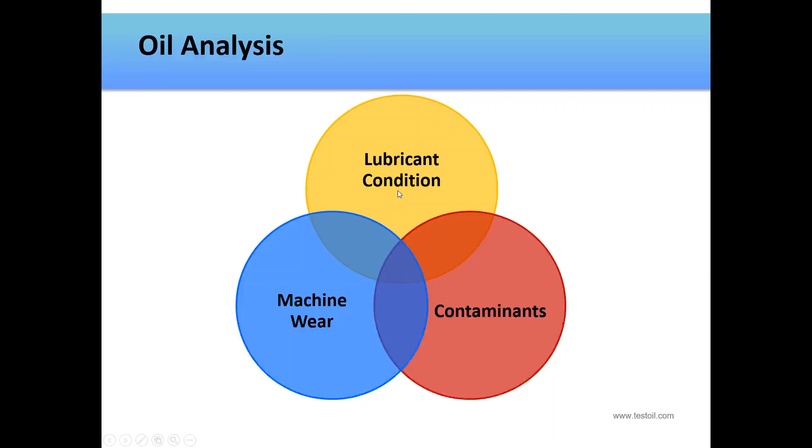Now, the first test that we'll talk about today is viscosity. I can't imagine there are very many samples that come in that don't get this test. This is a very basic test. We're measuring the thickness, or the resistance to flow, of the lubricant itself. Ideally, industrial oils are measured at 40 degrees Celsius, and motor oils are measured at 100 degrees Celsius. On the report, it's reported as kinematic viscosity in centistokes.

A lot of times when I'm taking a look at the report, especially when it comes to viscosity, knowing what kind of oil is paramount. And you would be surprised at how many samples come in that don't have an oil identified, and that really handcuffs me. I can't give a recommendation of whether or not this is in or out of range if I don't know what the oil is.

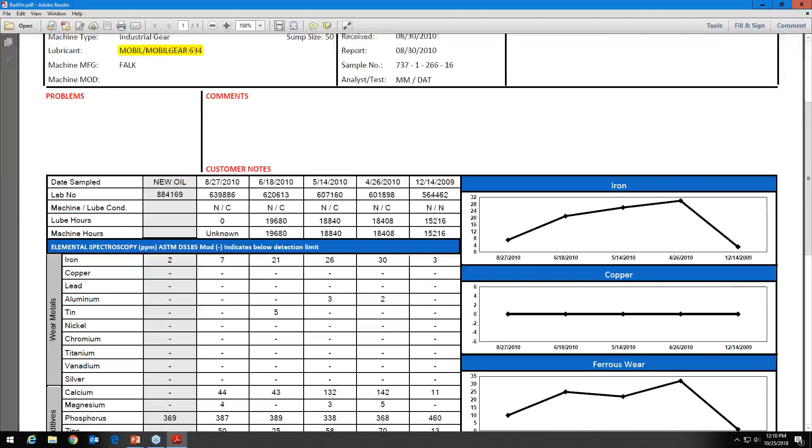And for most of our oils, we have a pretty good library of oils. Now, we don't have every single one that's on the planet, but the main ones, especially Mobil products and Shell and Lubrication Engineers, we have a lot of different resources when it comes to what the new oil should look like. So this one does have a new oil column populated. If you get a report that doesn't have it populated, that means that we haven't seen a sample of new oil of that product, and until we get one, we won't be able to populate that column.

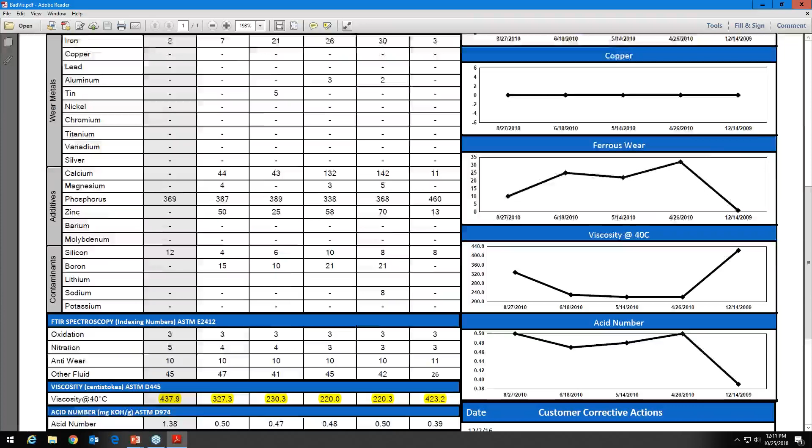All right, so we're working top down. We want to know what is the viscosity grade of this product. The new oil falls at 437.9, and that's within 10% of a 460. So a 460 is our viscosity grade for this product. And taking a look at this particular sample, we can see that this has definitely had some viscosity issues. I like to use this one as an example because I believe that this is a straight viscosity issue. There's a misidentification going on here between what is in our database and what's in the actual machine.

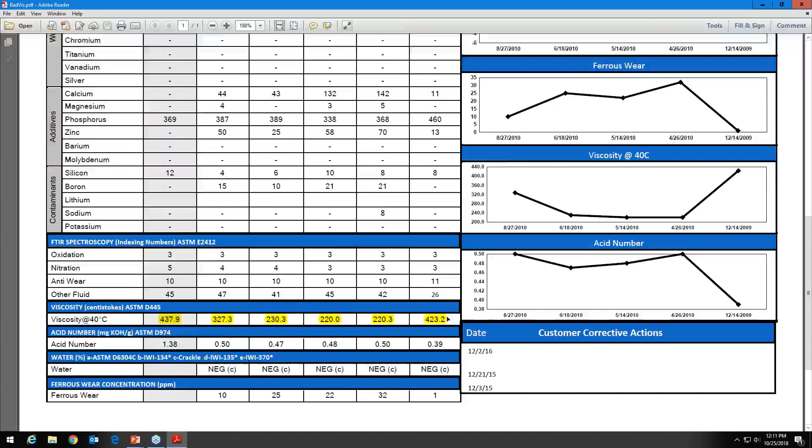So this December 2009 sample back here is a 423, and that's in the ballpark of a 460. However, we can see that the very next sample went to a 220, and that's like 2 grades away. So of course that's going to be rated critical. It was 220 the next one, 230 the next one, but then our most recent report has 327.3. So we've gotten closer. This is the next grade up from a 220 to a 320, but it's still not the right product for what we're saying is either on the report or in our database.

So when I see reports like this, to me, this is an oil identification problem. This isn't necessarily a problem with the oil itself. This oil probably is supposed to be a 320. It looks like a 320, but we're saying that this machine should be having a 460.

I see this happen a lot with new programs. Usually, the first time that we see samples from a new customer, we get the information from their database, we put it into our system, and then we do the first round of samples. We'll run the first set of samples, and a number of them will be flagged for viscosity, and when you look at it, it's really an issue of identification, not necessarily that this oil is bad and needs to be changed out. Well, if we change it out with a mismatched lubricant, we're not really making any progress.

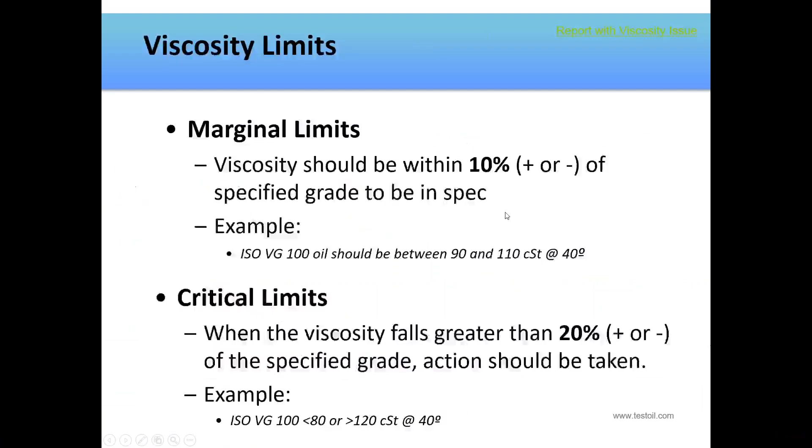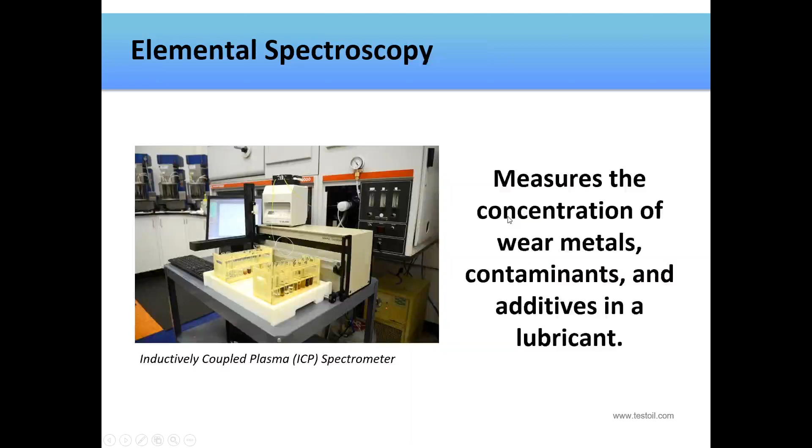So another common test that we run is called elemental spectroscopy. If you're familiar with oil analysis reports, this is the section where we list all the different metallic elements. We measure 20 different elements, and they're broken down into general categories of wear metals, contaminants, and additives. On the report, they're in parts per million. It measures metals in solution, which goes along with solid debris below 7 microns in size. It's blind to larger particles.

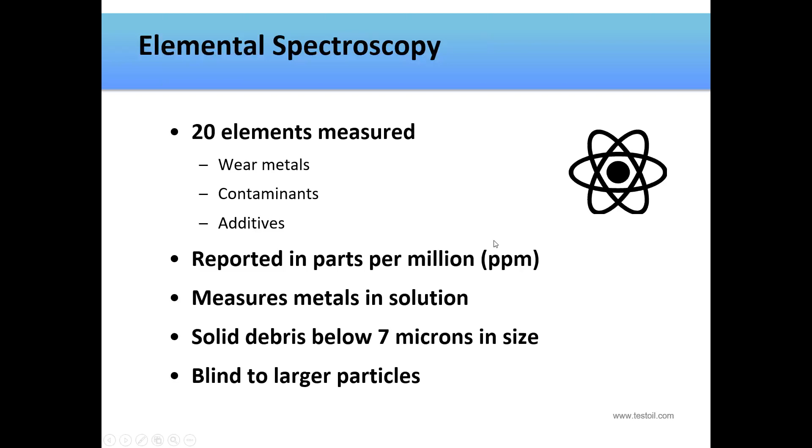This is really important when we talk about report interpretation, and it dovetails into test package selection. Let's say you have a very large gearbox that, when it goes into a failure mode, generates very large particles, but not very many small particles to go along with it. We wouldn't want to rely on this test alone to find that kind of problem. If we understand that this instrument can't see very large particles, we would want to back it up with another test, and we'll talk about some of those other tests in a little bit. That's a key thing to know about interpreting the data from this instrument.

If we're taking a look at the report and we see one metal dominant over another, or a mixture of some, like copper or tin or lead, it can point us into certain directions of what exactly is wrong with that particular machine.

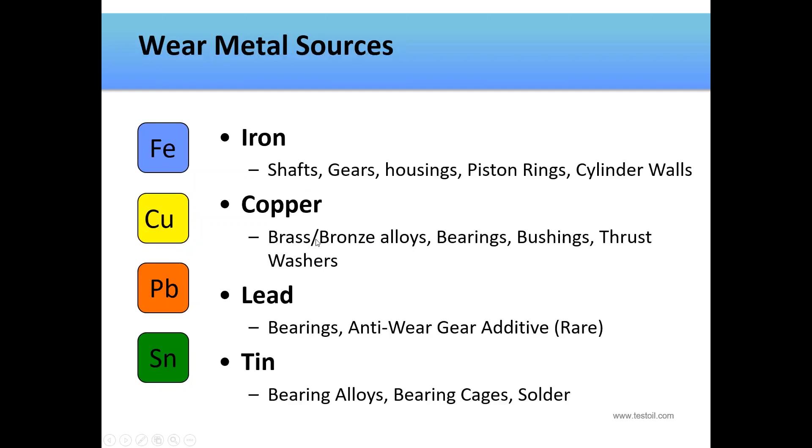Some other wear metal sources are aluminum, chromium, nickel, and silver. And let's take a look at a report with a wear issue.

Matt, can I jump in real quick? Will you just explain the new oil column? I do have someone asking me if that's filtered or unfiltered oil, and maybe you could discuss the difference between the reference oil that we used to call that column.

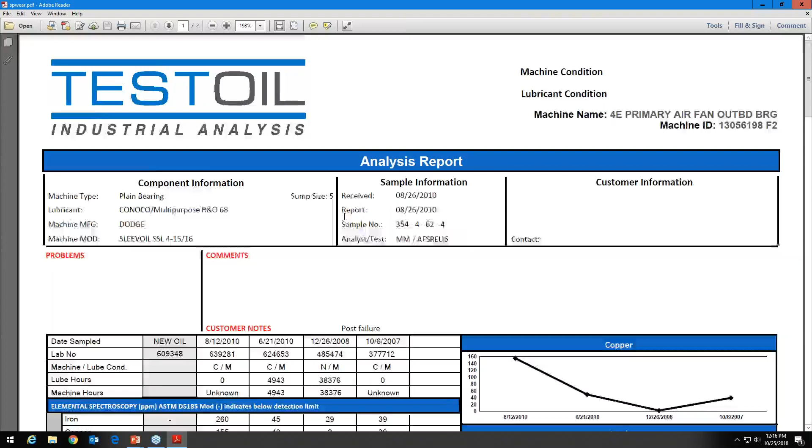Sure. Yeah, and I can use this report right here that has one. So this one here has our lubricant as Conoco Multipurpose R&O 68. And for this new oil column, at some point a customer has sent us in a sample of new oil. Whether it's filtered or not, it doesn't really matter, because we're not going to use the particle count as an alarm.

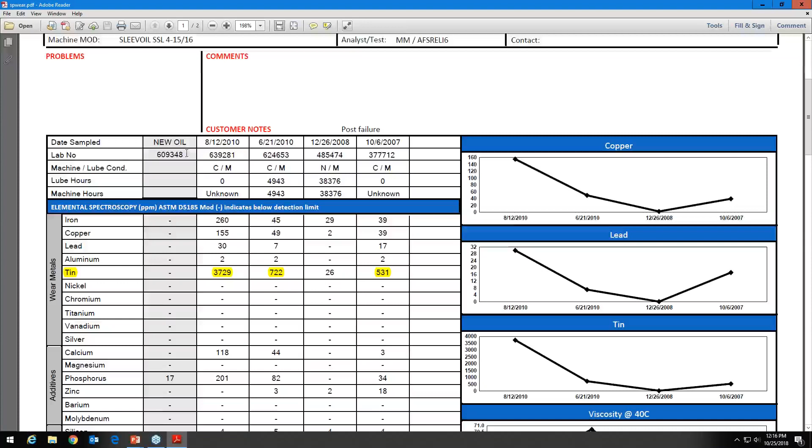We're not going to say that because your sample is dirtier than the new oil, that's not exactly the alarm that we use. And I'll talk about alarms for particle counts in a little bit. But for the new oil column, that's exactly what it is. If somebody has sent us a sample of new oil, we run it in a house account, and then we attach that onto the oil.

So when you take a look at the report, that new oil is attached to whatever it says here on the top of the report. Like I said, this one says Conoco Multipurpose R&O 68. Somebody has sent one of those in, and then we attach it from that point forward.

Now, there are some options. Let's say that we have a customer who says, well, I'm very particular about what I want to see on my new oil column, and I only want you to use what I send you. We have provisions that can do that. We can attach new oils from a particular customer to their reports only. But again, we're kind of using the bank of knowledge from everybody to post these.

That being said, if there's a big difference between the lab number of the new oil and yours, one being very small and one being very large, you know that perhaps that's an older reference that we might want to get updated information on.

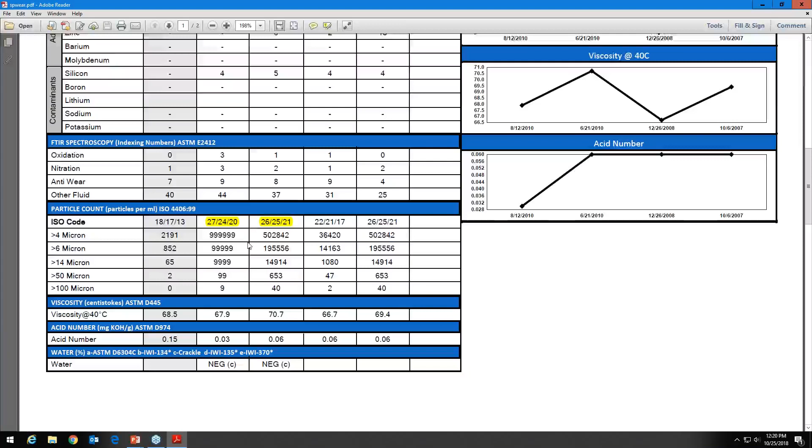And just as a side note, notice the particle count on this is significant. In fact, if you get a report with all 9s on it for particle count, that essentially means that it's so dirty that it doesn't even run on the particle counter. And this other result before is actually the maximum reading of the particle count. So a lot of particles in the oil.

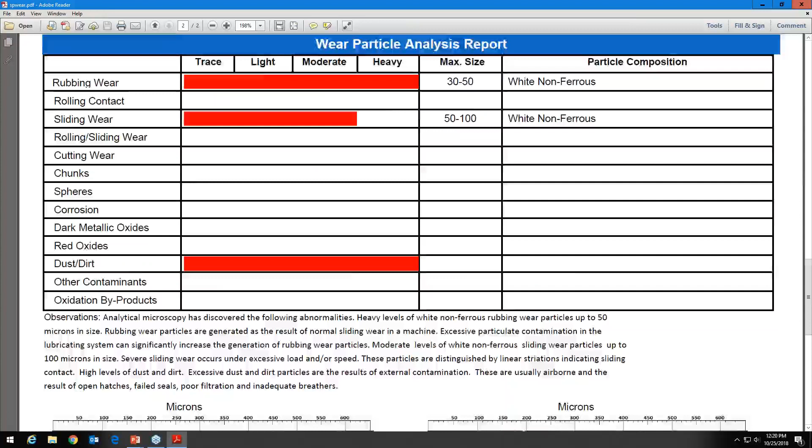We've got significant amounts of wear metal, especially tin, on this particular machine. And if we take a look at microscopy pictures, we can see some very large wear particles. And when we take a look at these pictures, a lot of times I refer back to these when I'm trying to decide, hey, what do I want to make my overall machine condition on this report? We always leave it up to our analysts to have the last word on how we should flag this report.

When I'm taking a look at the reports, especially when I see, one, we have a significant tin number, two, these particles are very sizable. So I know that there's a major problem with this particular machine. So I'm going to make this report critical.

But sometimes, and we'll talk about it a little bit more, you may be above the limit on like iron, but when we take a look at the analytical microscopy, we might find a different story. We might say, oh, well, this isn't really metallic wear or active wear, it's corrosion. And that might change how I interpret the report, what kind of rating I'm going to give it.

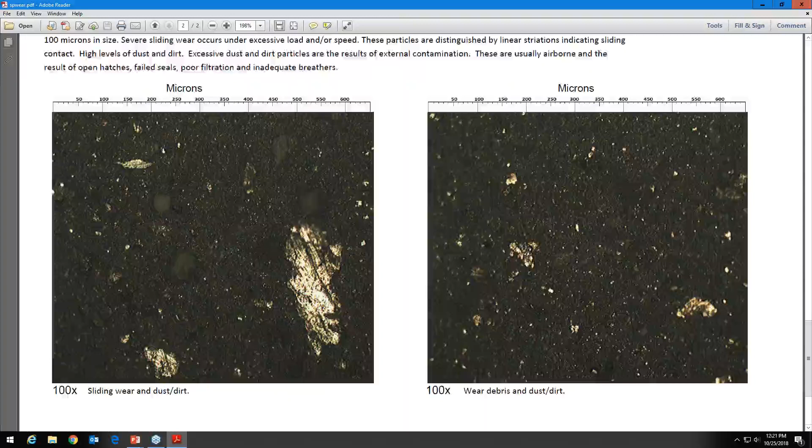But we give a lot of leeway to our analysts as far as what's the overall machine condition. Just because we have this high number here, we want to take a look at that additional information from the analytical microscopy to make a decision on, is this marginal, is this critical? Maybe depending on the rest of the data that's on the report, we can see that perhaps it wasn't the best sample. Maybe it's not a representative sample. That can happen where, let's say we have an unusual particle count and we see a lot of dust and debris. We're going to see some other stuff too if we haven't pulled a really good sample.

All right, so in general, I can give you a number on wear metals. I can say, hey, your iron's 50. Okay, is that good or bad? We have to put limits on these numbers. And for my example of iron of 50, let's say that we have a small gearbox. 50 might be perfectly normal.

So a lot of times when you take a look at the report, especially if we have historical data, when we have a lot of information from that particular machine, we could say, yes, a 50 is unusual because previously it's been steady at 10 parts per million. Or we can say 50 is not a problem because it's always been 50 the last few times that we've seen it, or we have a slowly increasing trend that we're seeing.

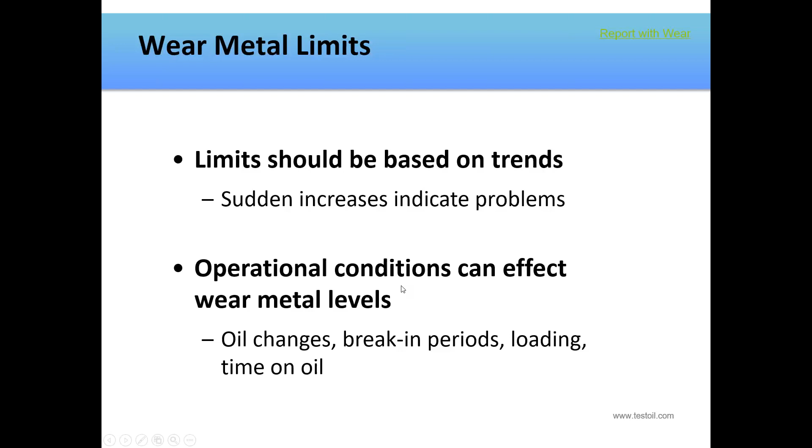That being said, operational conditions can affect wear metal levels, meaning if there's an oil change or it's a brand new machine, or we've changed the way this machine runs or the type of load that it's under, that can make a difference. And especially with loading or changes in that, sometimes as analysts we don't get that information. And so we may see, oh my gosh, this iron has increased quite a bit. You receive the report back and say, we're changing what we're doing with this machine, and that is the reason why we're having that particular issue.

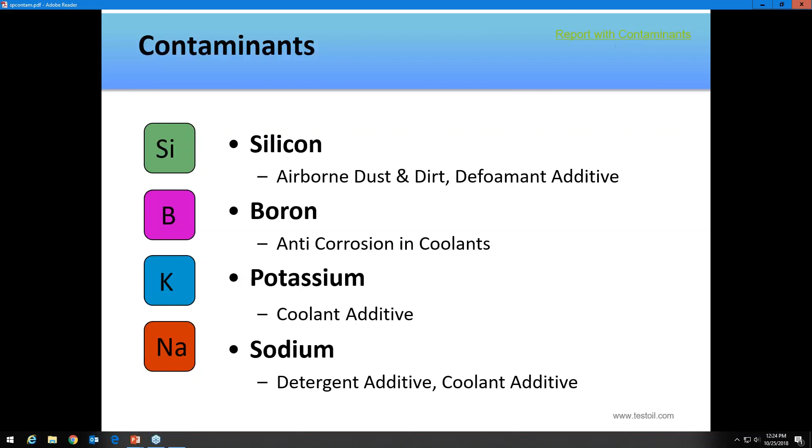All right, so the other category of elements are contaminants, things like silicon, boron, potassium, and sodium. Let's take a look at a report that has a contamination issue. So again, working top down, we have machine type. It's a hydraulic system. It's using an anti-wear oil with a viscosity grade of 46.

And right off the bat, even before I go down and look at the rest of this report, I'm already thinking, all right, anti-wear. I should be seeing elements like phosphorus and zinc. That's part of the anti-wear package. Some of them have calcium in them as well. So let's take a look at what we actually have on here.

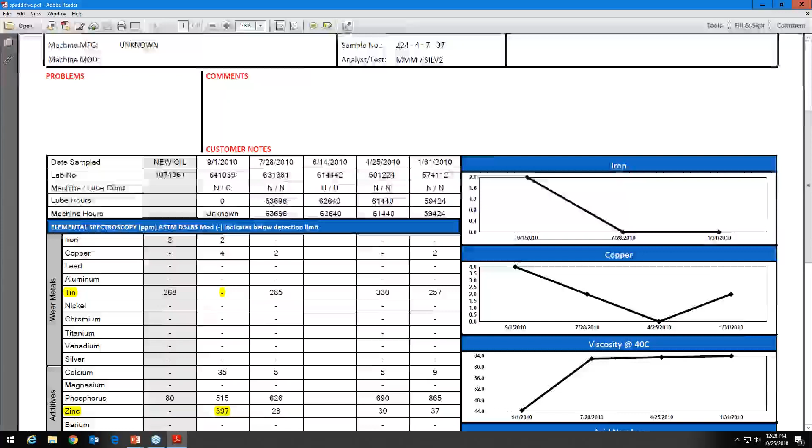So if we take a look at the new oil column, we notice that this new oil actually has tin in it. With this particular product, it's a byproduct of how it's made. This 268 tin isn't a wear metal. So I like to use this report because it shows you that just because we group these into general categories doesn't necessarily always mean that, oh my gosh, it's tin, it has to be a wear metal. Well, not necessarily, not in this case, for sure.

What else do we have? Well, it has 80 ppm phosphorus in the new oil. Well, what about our current sample? All right, so our current sample doesn't have any tin. And it has a significant level of calcium, phosphorus, and zinc.

This looks a lot like the report we just looked at with the anti-wear. And we know that an anti-wear product can be used in hydraulic systems. But we definitely have a significant difference here between what's in the machine and what we're saying is in the machine. If we take a look at the previous sample, that previous sample did have tin in it. So it looks like this was the correct product back here in July, but now here in September, it's not.

All right, so let's keep going down the report and see if we have any other information. So viscosity. The new oil is supposed to be a viscosity grade 68. We have a 46. It was a 68 before. And then also take a look at the acid number. The acid number of the new oil was 1.31; this product that's currently in the machine is 0.42. It's lower, and significantly lower than our new oil. That doesn't naturally happen.

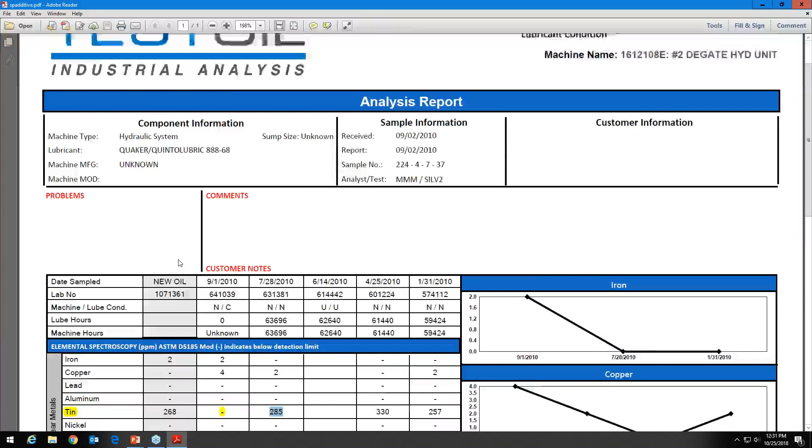And in fact, this product, the Quintolubric, is in the family of fire-resistant hydraulic fluids. So this one here is near systems with open flames, and they want to have a product that's fire-resistant. This product that's in the machine now is not. This is a safety issue. So this would be definitely a critical report. You have the wrong product in this machine right now.

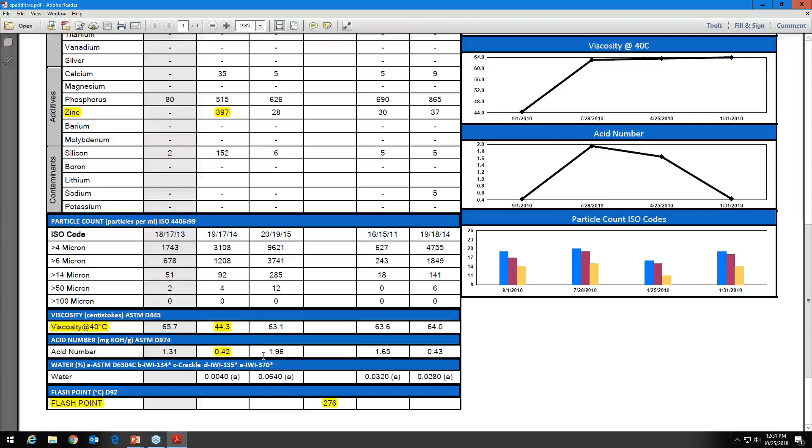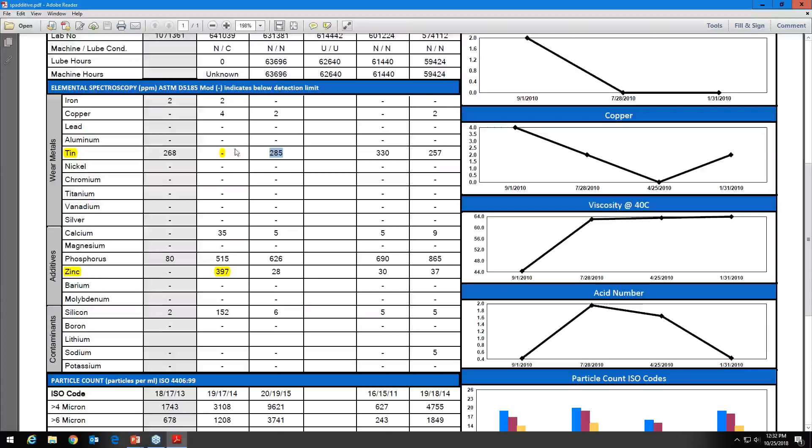And as we talk about fire resistance, just notice the flash point that was previously tested on this as well, that's a pretty high temperature, 276 degrees Celsius. So again, that reiterates the fact that this is a fire-resistant hydraulic fluid that's supposed to be in here, and what we have is not. So again, we detected that first by taking a look at the additives, and that there was a significant difference between the new oil column and our current result and previous results.

Okay, so that was talking about elemental spectroscopy. Now we're going to talk about a contaminant, which is water, and the test that we use for that is called Karl Fischer water titration. And it's governed by an ASTM method, D6304. On the reports, you'll find that we may be reporting in percent, that's our default unit, or if the customer has asked for it, we'll report as parts per million.

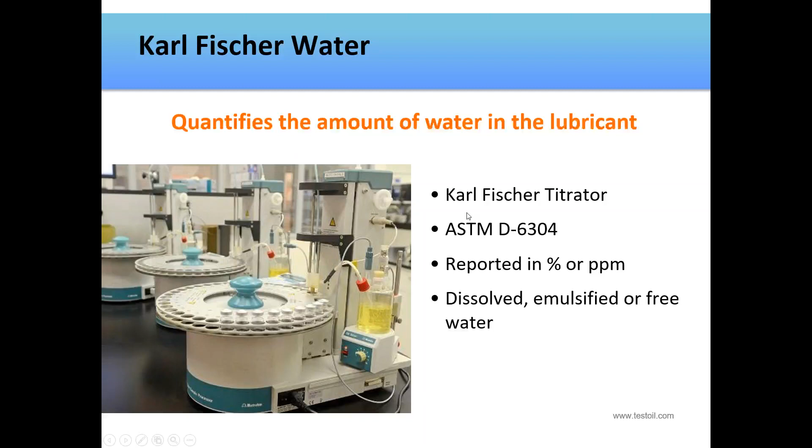So when I take a look at these and I see a report with high amounts of water, I always try to keep in mind, well, where is it? Where is this coming from? Is this a condensation issue? Is it coming from the outside? Or do we have a particular machine where we might have internal leaks that are allowing water to get into our lube oil?

So here we have an air compressor using a product called Sullair Sullube. And if we take a look at this particular one, we can notice that in our new oil column, the way this is formulated is it uses barium as the additive. That's kind of unusual. It's one of the reasons why I like to talk about this particular report, just to let you see there are different types of additive formulations out there. This particular one uses barium. On our current result, we don't really see any kind of elements. In the past, we had barium.

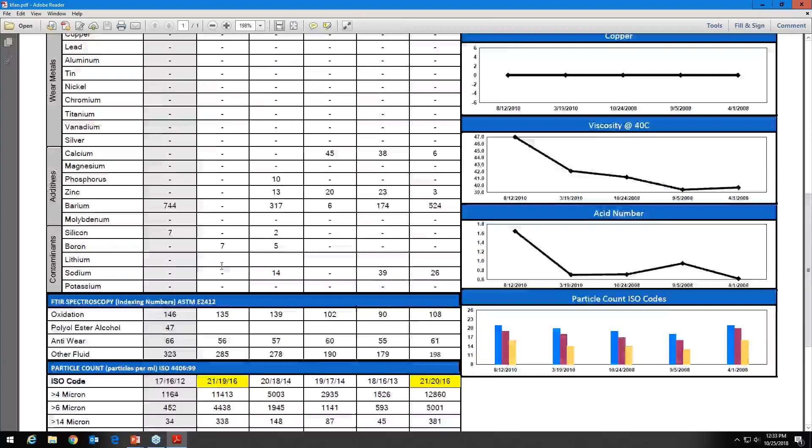And if we keep paging down, we can see some other stuff. We notice that on the IR that we'll talk about in a little bit, it does have an oxidation number of 146 brand new, which is kind of unusual. Some of the previous reports we looked at, the oxidation was not that high. All right, so we have a particle count issue. Our viscosity is too high. Our acid number is elevated, and here's our water at 0.8416%. So we've got a water issue with this.

Our oil is degrading, right? Because one of the things that we look for in degraded oil is an increase in viscosity, which was pretty steady. We've had 39, 39, 41, 42. Now we have this 47, a significant increase.

We also see the same thing with acid number. On this particular product, we do have guidance from the lube manufacturer, and they say that we should not have an acid number greater than 1.0 for this product. And this one is above that with 1.65, and therefore it's being alarmed.

But a lot of times what I find with not only this product, but a lot of different oils, is that when we tend to have a significant amount of water, it's not unusual to see a corresponding increase with acid number. And in this case, it's a fluid degradation, but in some cases, when we have both a significant amount of water and a high acid number, it's usually the water that's causing that initial problem.

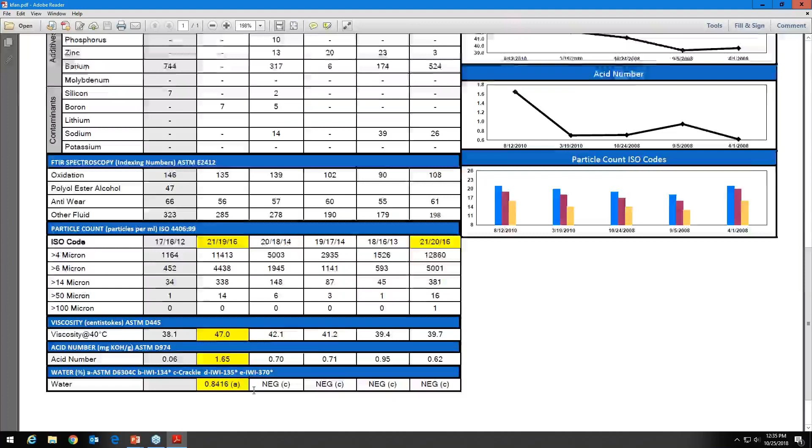This one here with the compressor, there could be many reasons why we're getting water in this system. It could be an internal leak. It could just be the fact that we're drawing in very humid air, and it's dissolving into the oil instead of going out the airstream. So this one's kind of interesting. It shows a little bit different formulation than we've seen. Let's take a look at another report with a water issue.

All right, so this one is what's called a Morgoil system. And these Morgoil systems are expected to get significant amounts of water in them. These things exist in steel mills, and they're in environments with a lot of water in close proximity. So they are expected to get some type of water contamination. In fact, the alarm limit for water on these systems is 2%. That sounds probably very high to you, but if it's less than 2%, they consider that normal on this type of system.

All right, so we've got this Morlina SD680 in this Morgoil system, and it doesn't really have much in the way of elemental content. Nothing that I would say stands out as far as additives. And as we go down the report, I want you to take a look at the relationship between the amount of water and our viscosity on this one. This is one of the reasons why I use this particular report.

Notice way back here that this particular load of oil with this 9,999 viscosity, again, that tells you that this fluid was so thick that it didn't even flow through our viscometer. There was an issue. But then this next sample, we have 20% water, 1,222. Remember, our new oil is supposed to be in the 680 range, and we have 700 here. So we have 20%, it's at 1,000. We have 5.96, it's at 1,053. 9.76, 959. 12% water, 1,071.

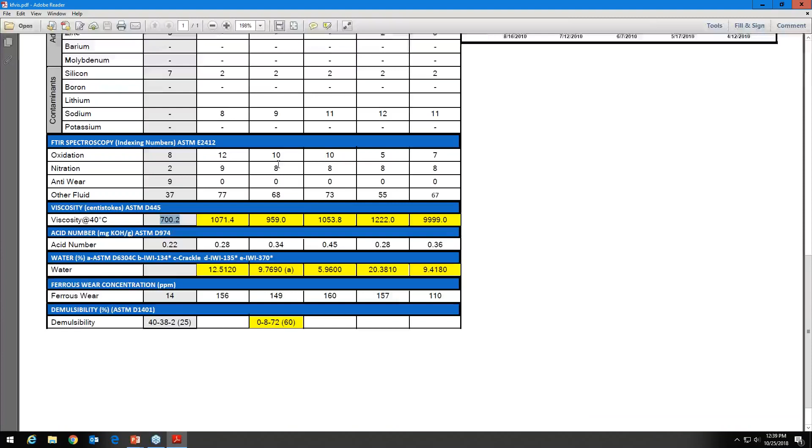So it doesn't drop out because there's something wrong with this lubricant. This lubricant needs to be changed out. It no longer separates from water, which is a key performance issue of this particular product. We have to be able to separate out. It's not, and that's why we have this. This is going to be another critical report.

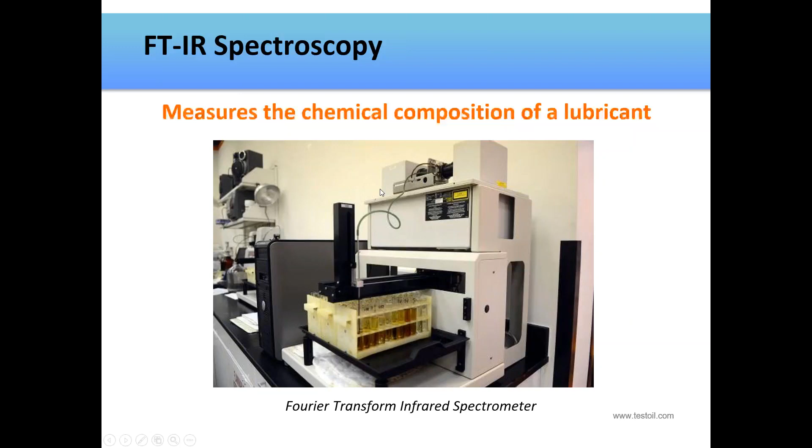Another common test that we run is IR spectroscopy. Where we talked about elemental spectroscopy before, where we were measuring different levels of elements, IR measures different compounds that are found in the oil itself. And some of these compounds can be oil degradation products, they could be contamination products, or a lot of times what I use the IR information for when I'm interpreting the report is, hey, does this match up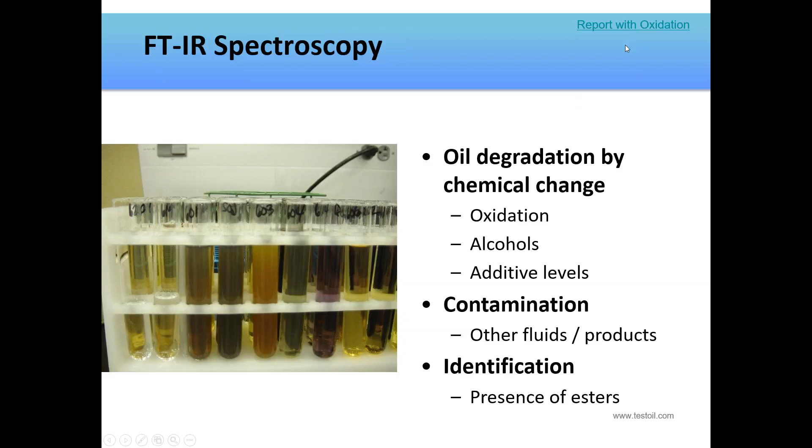with our new oil? If we have a significant difference between our new oil and our current sample, perhaps we've got an identification issue with the oil itself, like what we had with that report that we talked about earlier, the one that was supposed to be a 460 and it was really a 320. Maybe we have a totally different product.

All right, so let's take a look at a report with the IR issue. So this is a pulverizer. This is a coal pulverizer in a power plant, and it's in a real dirty environment, and it's using this product called ML686. Again, we may not know what exactly that means, we might want to take a look at our new oil column. And in the new, I'm just going to page down real quick and take a look at the new oil. So it doesn't have much in the way of additives, and the new oil measured to be 429.9, so it should be a 460.

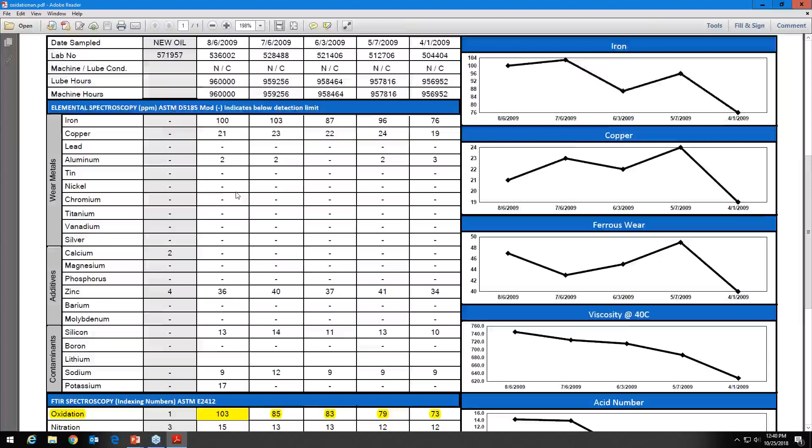All right, with that in mind, let's take a look at our current sample. We have some iron, but the iron's been pretty steady. So we don't really have a wear issue here at this point in time. However, as we come down to the bottom end of the report, notice that our new oil column, our oxidation, should be 1 or very low, and yet our samples have been significantly higher than that. The latest one being 103.

So our oxidation being high can mean one of two things. One is a contamination with another product, one containing ester, or it's indeed a degradation issue. So with the degradation issue, other things that I would like to see are, do we have increases in acid number? Do we have increases in viscosity? And as we take a look at those results, sure enough, here we had a 628, a 686, 715, 724, this increasing trend of viscosity.

And then that's coupled with these numbers that we have for the acid number, 0.56, 2.4, that right there is a significant jump. I get a lot of questions from customers asking, hey, my acid number increased from this number to this number. Is it significant? Sometimes it's not. There's a little bit of leeway in a lot of these tests where we might not get to the second decimal point the same result. But this is definitely a significant increase, and it continues. 2.4, 5.3, 13.8, 14.25. All right, so this is all telling us the same story. And the story is that this is an oil degradation issue.

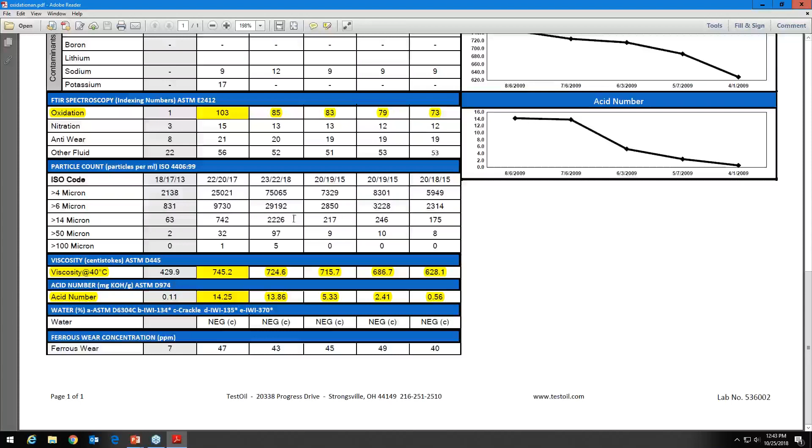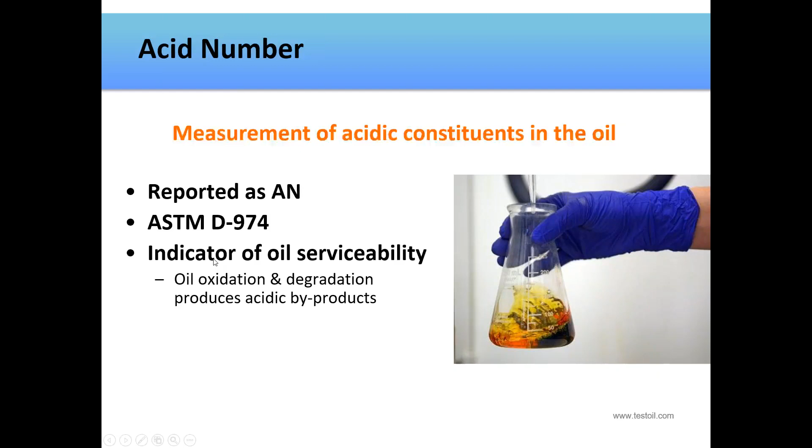All right, so acid number, we talked a little bit about that so far, and generally it's governed by method 974, and we have here, it says indicator of oil serviceability. What does that mean? What it means is that when we have increases in acid number, we have to look at why. And the two reasons I can think of off the top of my head why we might have an increase in acid number are, one, the very report that we just saw with a degradation issue, or somehow we are getting another product in there that may have a higher starting acid number.

So our rule of thumb with acid number is that it's lowest when the oil is new and increases with use. And in fact, I find it interesting, I just had a question about this next point this past week. Acid number of a used oil is typically compared to original acid number. The customer had emailed in and was asking, hey, what are your guidelines for acid number? Because you alarmed my report, and when I look at the product data sheet, there's no guidance as far as acid number goes.

And my reply to that was, well, acid number, especially starting acid numbers, really depend on how much additive is in there or the formulation of the oil. So I just can't tell you, hey, if you have an acid number above 0.2, you need to change the oil. That doesn't really apply for a lot of different products. So let's take a look at a couple of samples with issues like this.

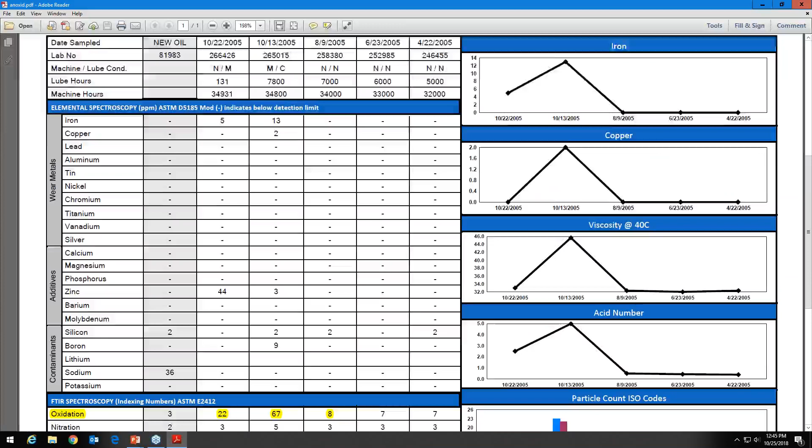All right, so we've got a compressor using this product called Clear Lube RS32. And if we page down and just kind of take a look at the new oil column, it doesn't really have much of an additive package as far as metals go. Our oxidation is 3 on the new oil, and let's kind of take a look at here. So it's a viscosity grade 32, but we don't have any information on the acid number of the new product.

I would expect this kind of product, it's a mineral oil because it's got this really low oxidation. It's 32. I would expect this to have a fairly low starting acid number, mainly also because it doesn't have anything in the way of additives. So it's probably going to be very low. All right, let's take a look at the report.

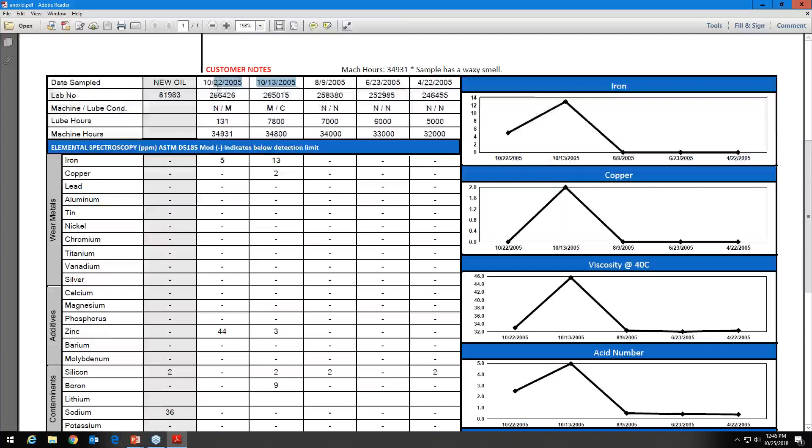I think the key part of this report is notice that these two sample dates are very close to each other. So we have here October 13th, and then we have one October 22nd. And so what happened? So we had this sample. It was getting reports done on it, and here we sent out a report with a 67 oxidation and a 45.7 with a 5.0 acid number. It looks kind of like that other report, doesn't it? Where we have a degradation issue. So we have the big three here: oxidation is high, viscosity is increased, and a significant jump in acid number.

Now, the reason I like to talk about this report is, remember how I just mentioned about changing out the oil? Well, they just did a simple drain and fill with this system, and notice this is brand new oil on this sample, and we're already at a 2.5. And look at the history. 0.39, 0.44, 0.50, the significant increase. This is way higher than what we've seen previously on that fill of oil. So already we know that this oil is under attack.

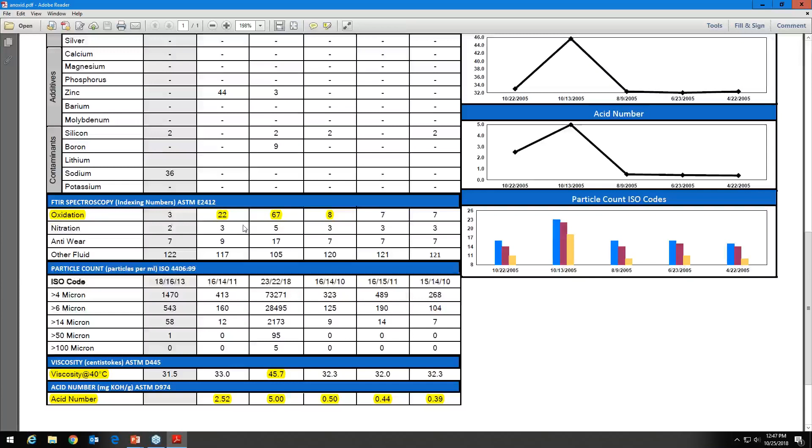And look at the oxidation. Our new oil is supposed to be 3. We already have a 22 with this brand new oil. So this is a case where we didn't get all of that old oil out, and now our new oil is under attack by this oil that's gone bad.

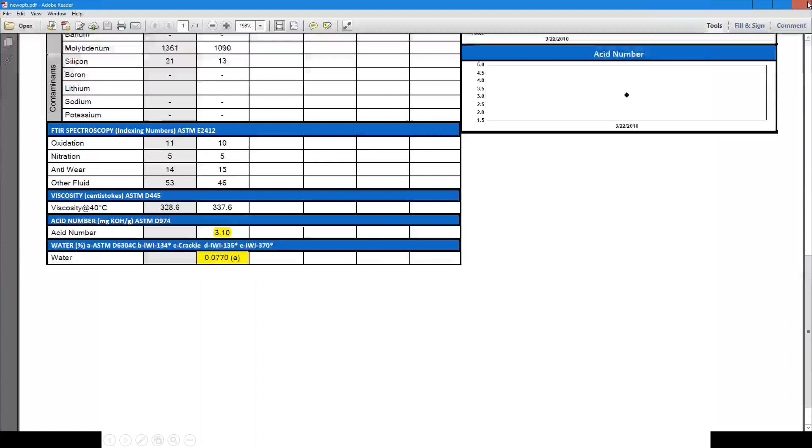Another one that comes to mind with a fairly high, significant starting acid number is engine oils. Engine oils have a lot of additives in them, and it is reflected in the starting acid number. So I think that's a good one to talk about. I like having that particular report.

We mentioned particle count before. In general, it determines the cleanliness of the sample. And what we like to use at Test Oil is a technology called pore blockage. But there are some other types of particle counters out there that use a different technology. You might hear them being called things like optical particle counts or laser particle counts. And that's a different technology.

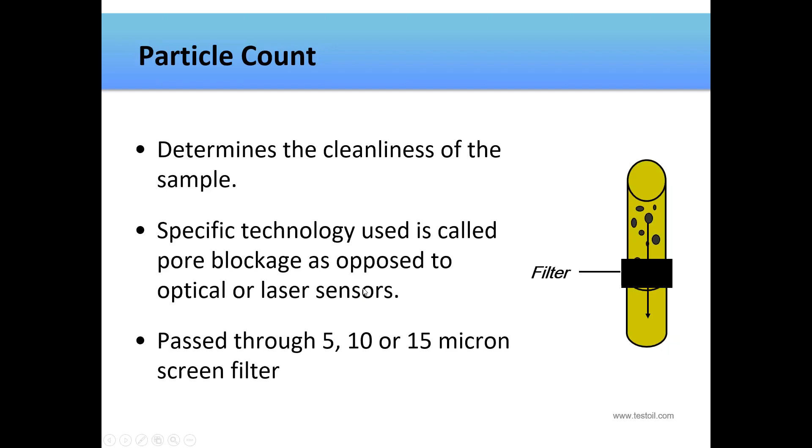And talking about the differences in those is kind of beyond the scope of what we want to go over today. But I would say that the way I've come to think about particle counts is that it's a ratio of the amount of particles that are entering the oil versus the amount of particles that we're able to pull out.

Over the years, I've come to think about particle counts in that fashion. I get a lot of phone calls from customers, and they'll say, hey, I just got this report back that's got a high particle count, I'm going to change out the filter. And my response to that a lot of times is, well, keeping in mind that we're measuring the amount of particles getting in and the amount of particles that we're pulling out, if you just change out the filter, you're only working on half of that equilibrium. You're only working on how much we're able to pull out. Perhaps our problem is how many are getting in.

So a lot of times, if we're taking a look at how particles get into machines, it could be things like contaminated new oil, or it's got a breather on it from the 60s, or there's some other way that particles are getting in. And sure, we can change out the filter, but if we're not really doing anything with the amount of particles that are entering the system, we may not really see an improvement with particle count over the long term. I think that's something to keep in mind.

Now, as far as what we're taking a look at on the report, they're broken down into 5 different size ranges. So it gives us a particle size distribution as part of the information that we get from the instrument itself. And you'll notice on this particular screen that we have the raw numbers. So if we take a look at this one here, with the 21,801, that's 21,801 particles greater than 4 microns per milliliter of oil. So that's the raw number.

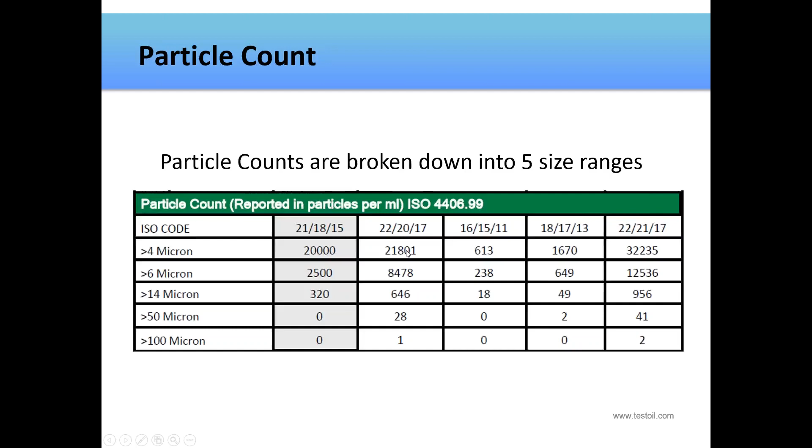When I take a look at the reports, if I see a little bit of variance of one ISO code from sample to sample, I don't really consider that a significant change. I consider that kind of the same result. But notice that these numbers double every time that we go up one number in the ISO code. I think that's a good way to think about it. If I get an ISO code that is an increase of 2, we've quadrupled the amount of particles that are in that oil.

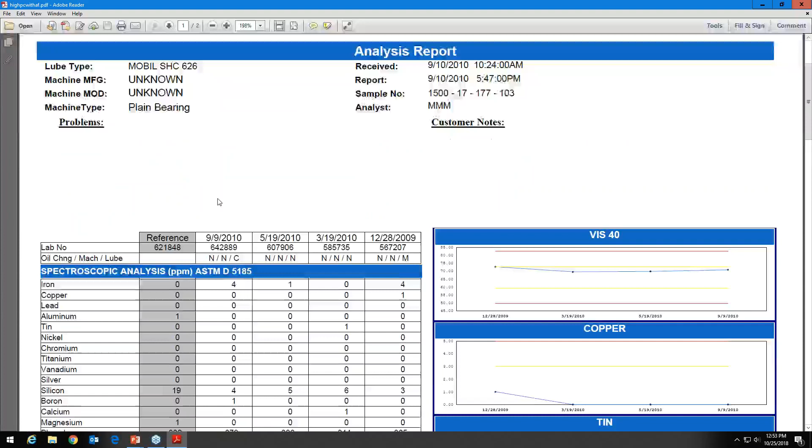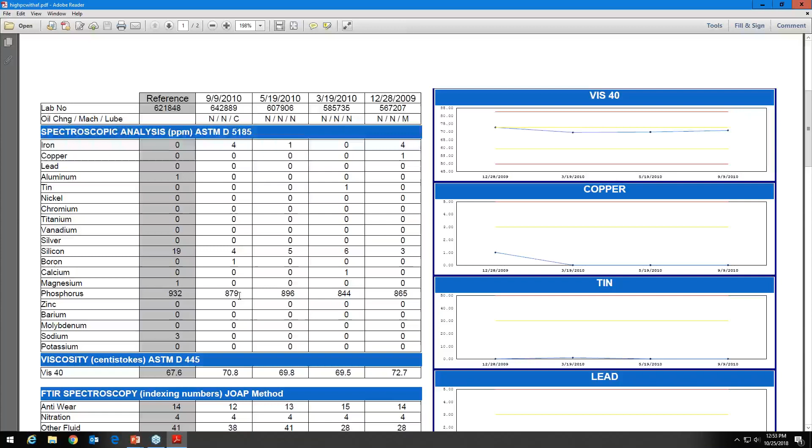So here we're going to take a look at this report. It's using a product called Mobil SHC 626. It's used in what's listed as a plain bearing. And notice that in our new oil column, we have phosphorus. This SHC product line has what's called an EP additive package. And anything with an EP, extreme pressure, we would expect to see some significant levels of phosphorus. That's what this has, and that's what our sample has. So as far as interpretation goes, this looks like a good match. It looks like it's the right product.

And as we take a look at the rest of the data, our IR information matches up. We're in the correct grade. We do have a water issue on this sample, and we do have a higher particle count than what we've seen previously, above the alarm limit for this type of machine. If we take a look at the analytical microscopy on this one, we see a lot of what's described as dust and dirt, and a little bit of wear debris.

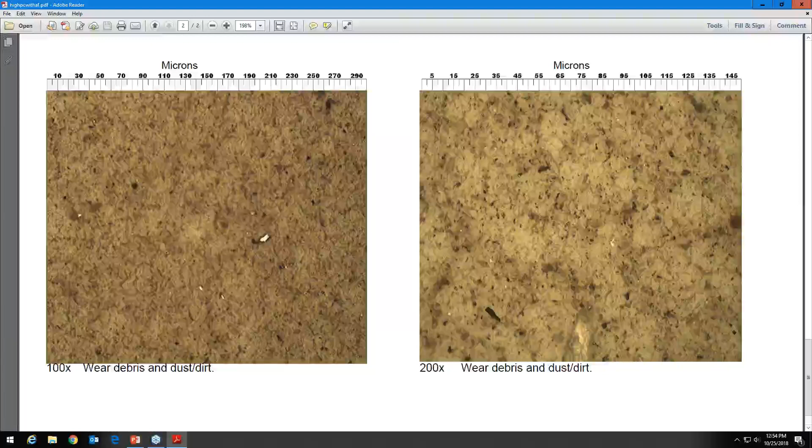But when I take a look at this, especially given what we've seen previously on the particle count, it's never been really clean. These are not low numbers by any means. But now we have this water that's showing up.

And the one thing that I always kind of consider is, how was this sample taken? Was this sample taken from a drain port? If this is from a drain port and we didn't properly flush, this is what I would see. I would see an elevated particle count, and I would see the presence of water. So I always think of this particular report as perhaps this was not the best sample technique when we pulled the sample. It seems very unusual that we went from not seeing any water to seeing some type of water

in this particular lubricant. So, sample technique is a big deal when it comes to, especially these two tests, particle count and water. If there's a problem there, or we're not pulling a representative sample, this is where we're going to see the difference. We're going to see the difference in particle count and water.

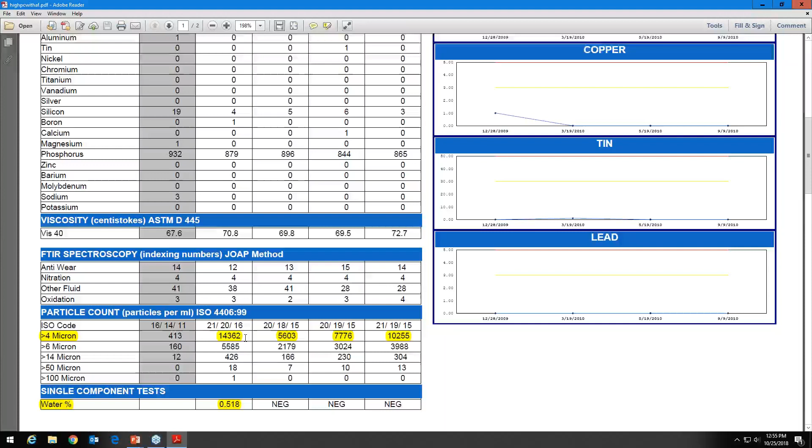And notice I included oil degradation. Sometimes, especially with optical particle counting, we can find what we call soft particles or varnish or insolubles. There's many different terms for them. But we may see maybe the source of our particles is from the oil itself degrading, turning into these insolubles and soft particles.

We may want to figure out where the water is coming from, see if we can address that. If there's no direct way of addressing that, hey, we need to inspect these desiccant breathers a little bit more often.

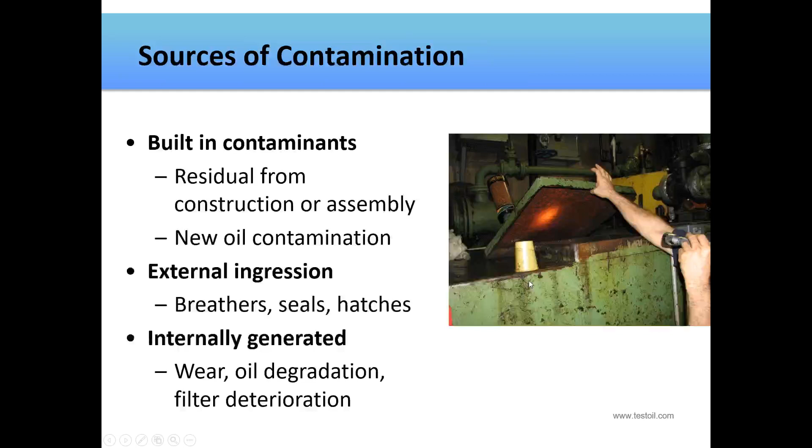So at the very beginning of the webinar, I mentioned that the elemental spectrometer has a limit of 7 microns for particle sizes that it can detect, and that it is a good idea not to totally rely on that test when it comes to certain machines and the type of wear that we would expect to happen if there's a problem with the machine: the generation of very large particles over generating any very small particles.

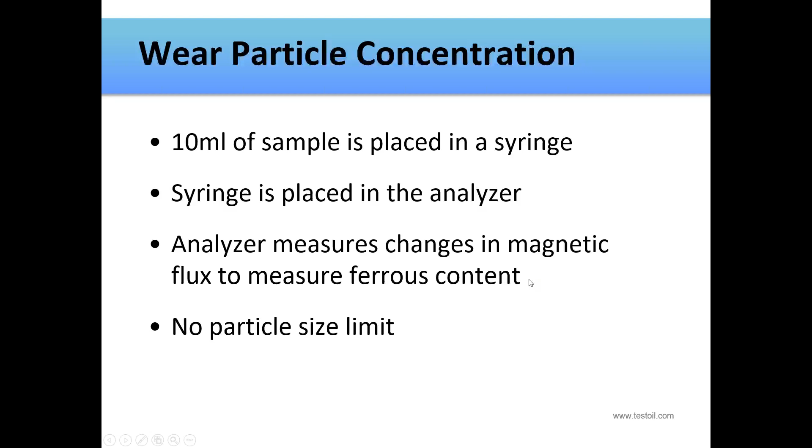And because we want to cover all the bases, we want a test that can measure ferrous wear or iron no matter what the size is. And this is that test, wear particle concentration. So we take a portion of the sample, put it into the analyzer, and there's no particle size limit with this particular test, and it reports in parts per million.

And I would recommend this on very large gearboxes. Perhaps when we're putting our test package together, we're considering, well, what do we want to get out of this? Well, we're going to pull samples from this gearbox. It's not filtered. All right, well, if it's not filtered, if we do a particle count on that type of machine, it's probably always going to come back pretty high.

So is there any kind of maintenance action that we're going to do from a high particle count on a non-filtered gearbox? Maybe. Depends on the criticality, but a lot of the ones that we see, usually not. There isn't anything that's done, and they just say, well, it's non-filtered, it's splash lubricated, we're not really too concerned about particles. But perhaps we're very concerned with, hey, is this machine wearing more than usual?

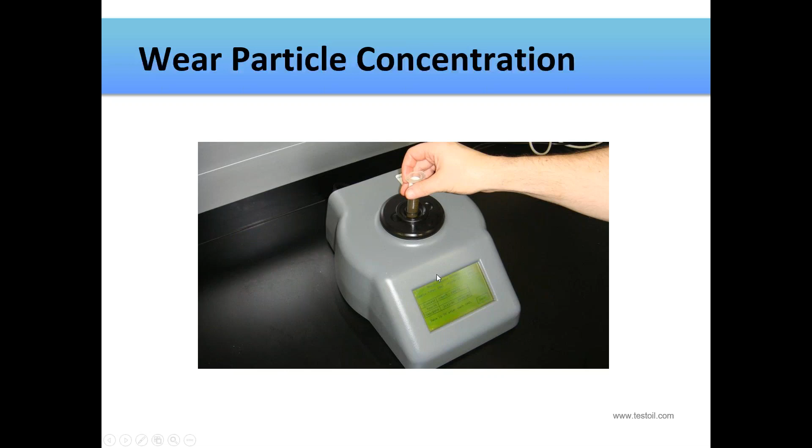And this is where we would want to consider adding this test with a machine like that. Do we want advanced warning of where the machine is throwing off very large iron particles? A heavily loaded gearbox probably is the spot that we would want to use that on. All right, so let's take a look at some reports that have some wear issues with the wear particle analysis.

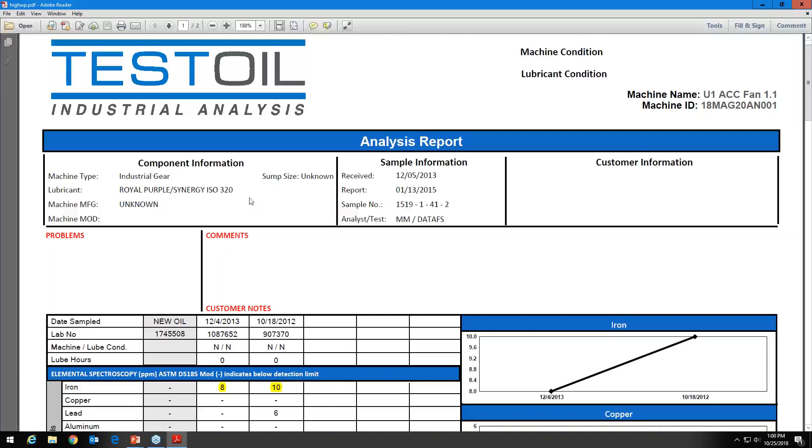All right, so again, we're starting from the top of the report. It's industrial gear. It's using a product called Royal Purple Synergy 320. So I'm thinking that we should have some type of additive to this. This should be an EP of some sort, I would think, or have some type of extreme pressure additive. I would expect our viscosity to be in the range of a 320.

And as we take a look at the elemental end of things, notice that our iron is not that bad. We have a 10 and an 8 for iron. That's not very high. And it does have our EP in it. It's got a phosphorus of 149. Our actual sample is 236 and 283.

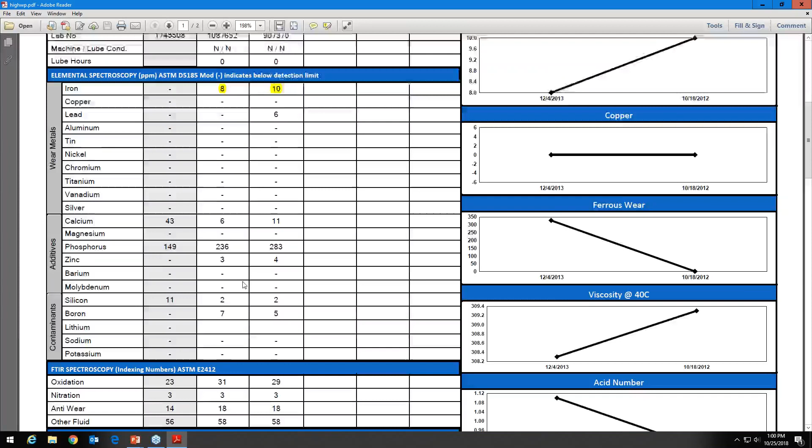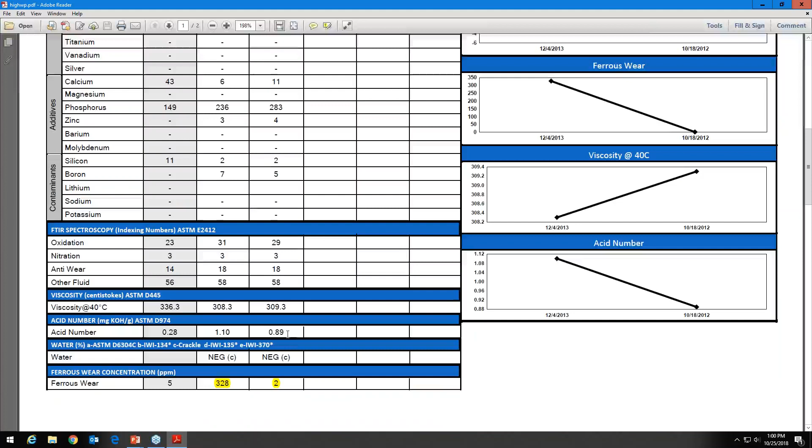The oxidation starts at 23. We have a 29, 31. That's in the ballpark. I'm not too concerned about that. Viscosity is right on for a 320. Acid number is a little bit high, but our in-service is a little bit higher as far as the additives go. So there's not a significant difference between these. I'm not too worried about acid number.

However, at the very bottom of the report, we see this significant increase in ferrous wear. And this is one of the reasons I love this report. So somebody might say, wait a minute here. We've got 328 ferrous wear, but we only have 8 for iron. Isn't that a problem? Well, we're in alarm for the ferrous wear. Let's take a look at the analytical ferrography for this particular report.

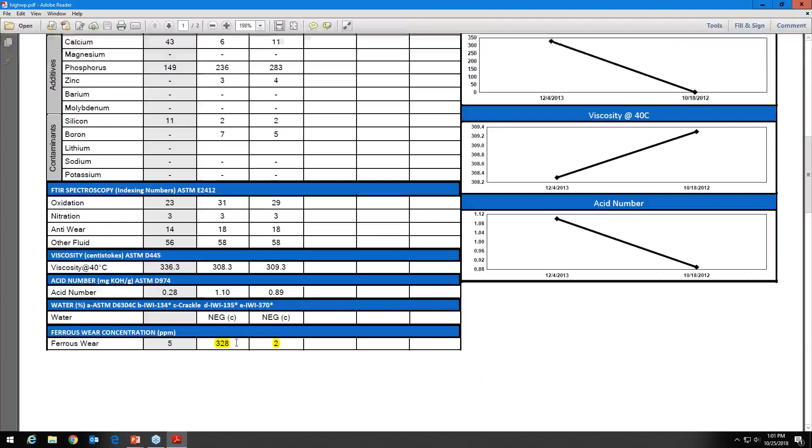So this report is showing us that we kind of have a strange particle distribution. We've got a lot of large stuff, but nothing really small to go along with it. This is a serious problem. This is definitely a critical report, and it's something that needs to be looked at very quickly, because this is definitely a problem. All right, so we saw a good example of this, where we have a low elemental and a high ferrous wear. Let's take a look at the next report.

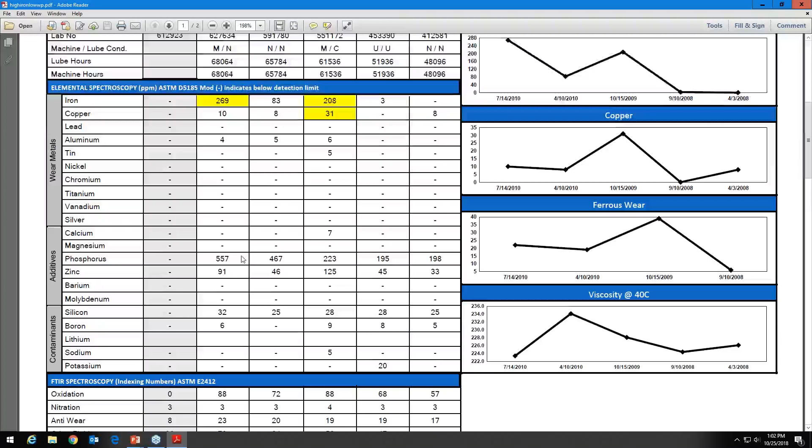This next report, again, we have a gearbox, Teresstic 220. Now, Teresstic products typically don't have much in the way of additives. Let's see if that's the same with this one. Yeah, so this is interesting. Notice our new oil column doesn't really have much in the way of additives, and yet our sample has a significant EP package. So we've got an oil identification issue here. The machine has an EP in it, but we're saying that it doesn't. Is there a problem there? I'm not really sure. Could be an issue.

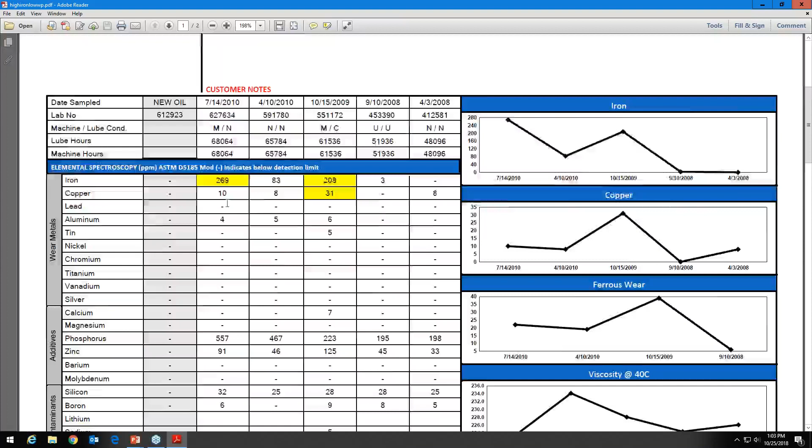But when we take a look at the iron levels, notice that we have a significant jump from our April to our July sample, from 83 to 269. That's unusual. That's a significant change. All right, what else do we have on this report? Okay, so we have an oil issue. Oh, wow, it doesn't really match up here either.

With the IR, we should have a very low oxidation, and yet this product has a significant oxidation number, and it's steady. It's not increasing. So it's a steady oxidation. That tells me that this is part of the oil formulation, that this isn't a degradation issue. Remember, if we're thinking degradation, we're thinking high viscosity, high acid number. This package doesn't have an acid number, but it does have viscosity, and our viscosity is steady. So this is a function of the formulation.

So with the EP and the high oxidation, this is a synthetic gear oil that's in the system, and not a Teresstic product that is in our new oil column. All right, so we have a synthetic EP. We've got a fairly high elemental iron, and now we take a look at the ferrous wear. Well, wait a minute here. 6, 39, 19, 22. Those are kind of steady numbers.

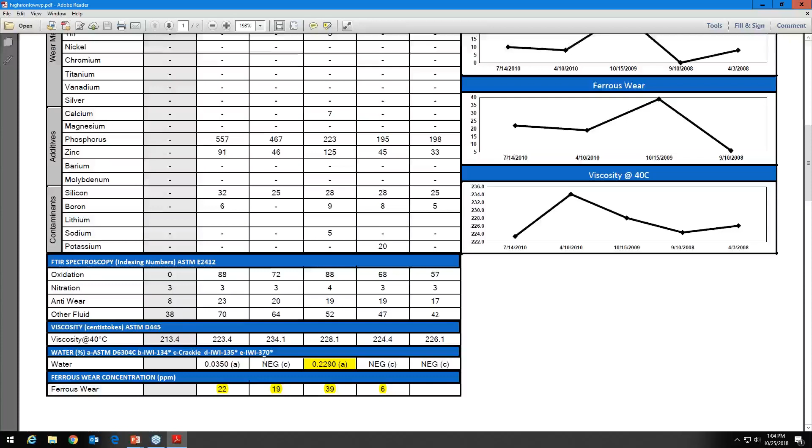All right, so what does that tell us? Well, even before I go to the next page, just think about what we've seen so far. So we've seen the high elemental. We've seen low ferrous wear. We know that the elemental is sensitive to very small particles. All right, let's take a look at the next page.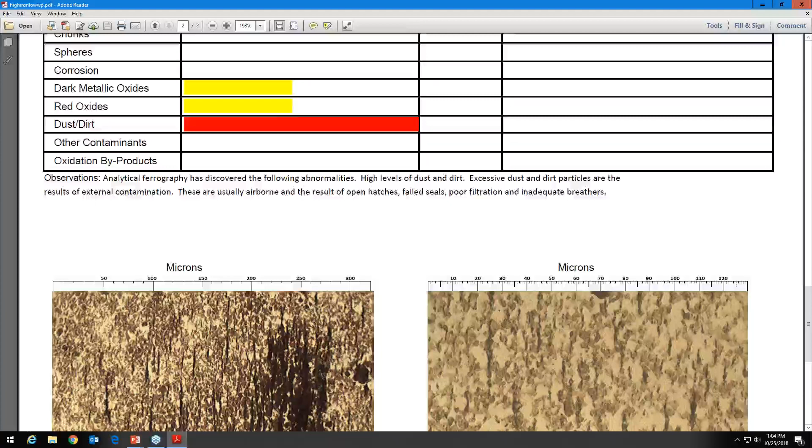All right, this is exactly what I was thinking we'd see. These are extremely small ferrous particles that are showing up on the analytical ferrography. That's why we get a significant elemental reading, but it doesn't really add up to much for the ferrous wear concentration. So again, depending on our size distribution, we can get a difference between those two tests that both report iron in parts per million, because one has a limitation and one doesn't.

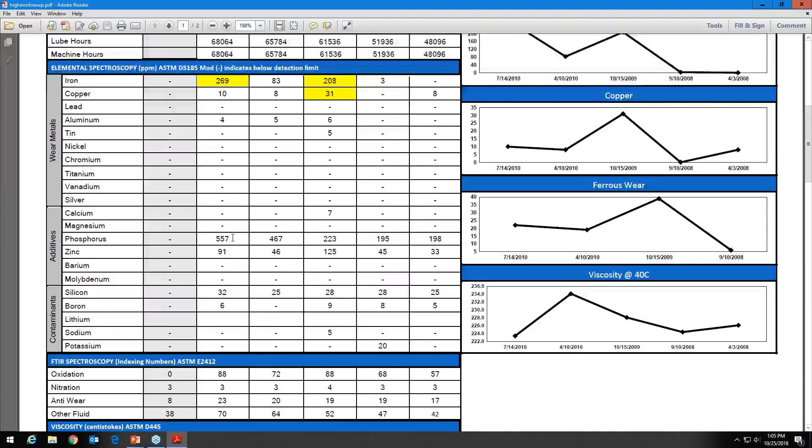So again, we see where we have very small ferrous particles, and is this a function of what we see up here? A lot of these EP products can be corrosive in nature. If somebody asked me, hey, what does it look like when you see corrosive iron wear? This is what it looks like. They look very small, and that's probably what's going on.

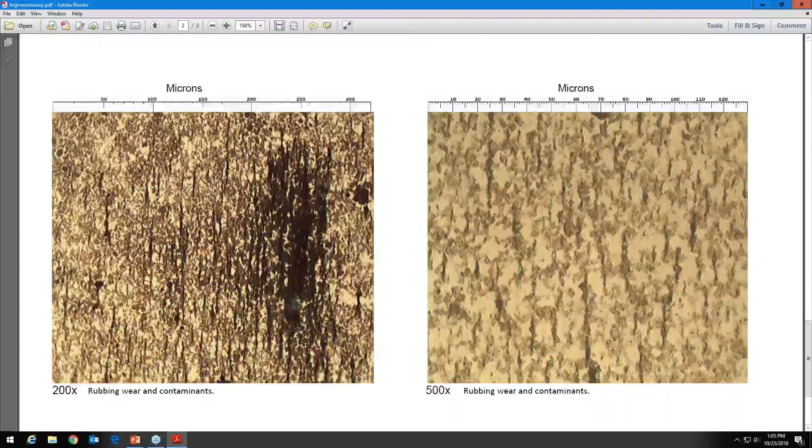So this could be a function of we've got the wrong product in here. Maybe we need to go to a different product so we don't generate so much corrosion in the system. But the main point here is I want you to realize that what we see on the elemental, in comparison to the ferrous wear, can also give us an idea of what the particle size distribution is for these wear particles.

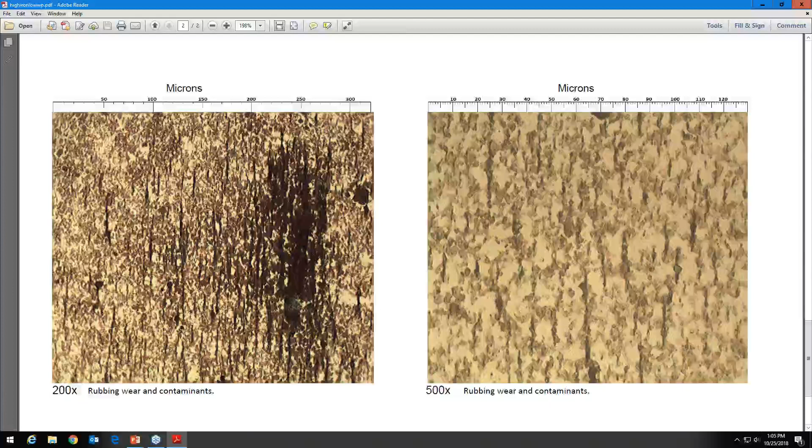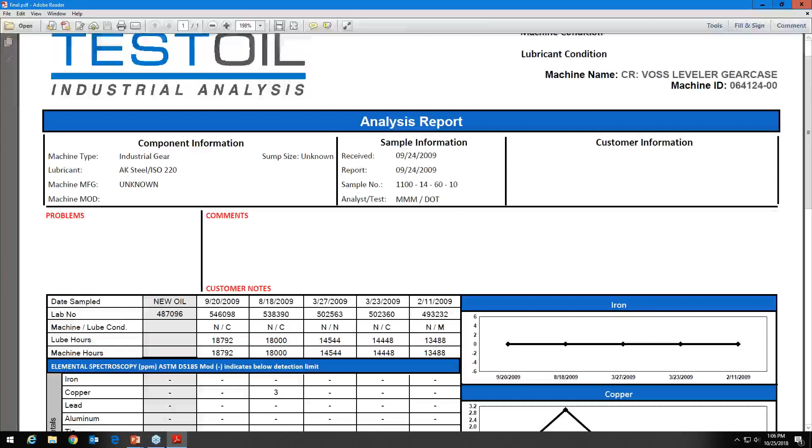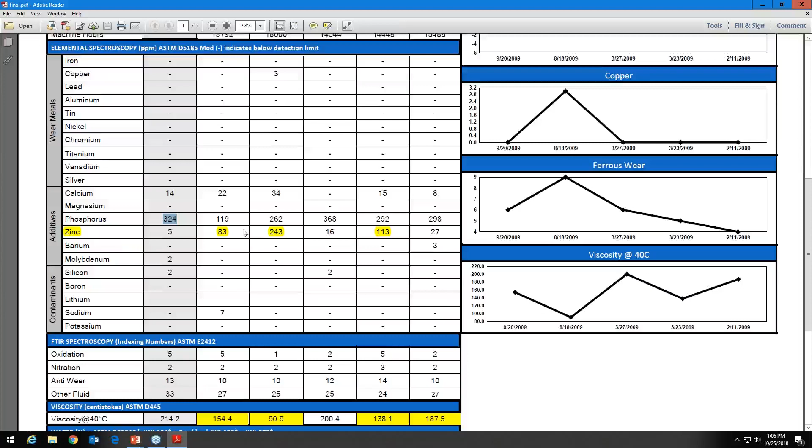All right. One final report for us to take a look at today. So this one is a gearbox, and it's using some type of a 220. We take a look at the new oil column. We can say that it's using EP220. Here's our phosphorus. And when we take a look at the report itself, we see these elements that we don't really expect to see for our EP, right?

We've got this zinc. So here was a low zinc. I'm not too concerned about that 16, but 113, 243, 83. Okay, those are unusual. Those shouldn't be there. And then we take a look at, well, what else is wrong with this report? Well, we've got some type of a weird viscosity issue.

All right, so this old report's 187. It's got the zinc of 27. And then our next report has 138, so it's gone down significantly. And going back up here, we see a zinc number of 113. So then we recover, and we've got a 200, we've got a low zinc. Then we go all the way down to 90, and we have the zinc of 243. And then we seem to recover again, so we're back at the 154 with a little bit lower zinc.

Now notice that the higher the zinc number, the lower our viscosity is on this particular one. Well, what other kind of oil did we look at today that had zinc in it? Remember those first few reports we looked at were AW hydraulic oils, and those hydraulic oils are going to be a lot thinner. Guess what? That's exactly what's going on with this particular system. This system has two parts to it. It's got a gearbox section, and it has a hydraulic section. And here, the hydraulic section is leaking into the gearbox section.

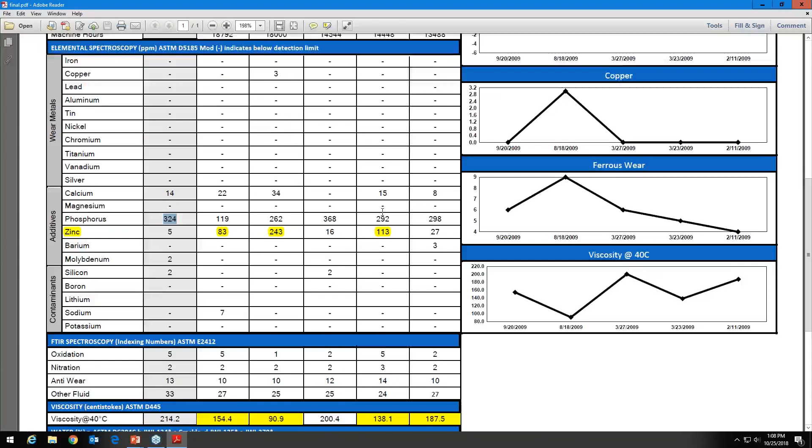So what happens is the customer gets a report, gets a critical, says, oh, we've got to take action. Let's go ahead and change that out. Well, this particular machine is very important to production. They can't stop it. It's got to continue to run. So they can't really stop it and make a permanent repair. So they get a critical report, they do a bleed and feed, they try to drain out as much as they can without affecting the operation of the machine, and then fill it up with fresh EP lubricant. But yet we're not fixing the root cause, which is the leaking hydraulic system into the gearbox.

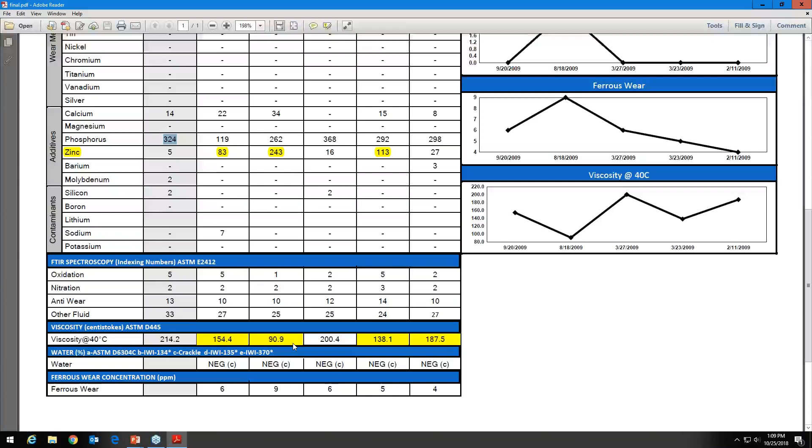So again, with our interpretation, we can understand, hey, we're getting elements that shouldn't be in there coupled with a low viscosity, hence we're getting a hydraulic fluid in here. Now, we still get samples from this machine; this machine did make it to an outage, and they were able to fix it, and now we usually just get normal reports out of this machine. So I think it's a good example of how do we interpret the report? How do we interpret the data?

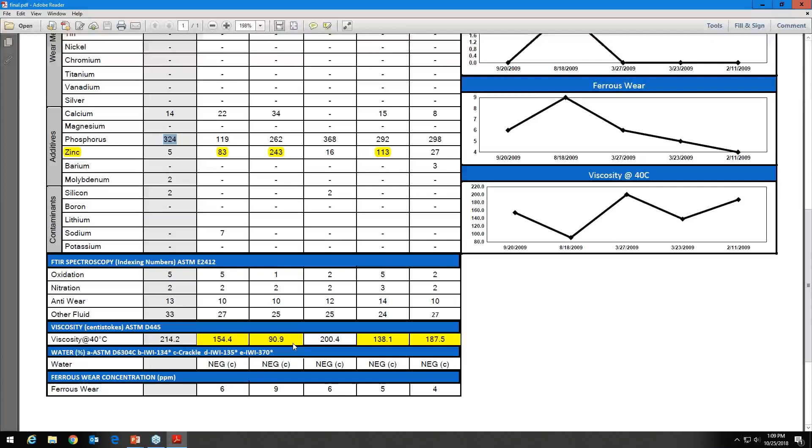And if we just looked at one thing, oh, we've got a contamination issue. Well, this tells us what is it contaminated with? Well, look at the viscosity. It's quite a bit lower. A product that's lower in viscosity and yet contains zinc. It's a hydraulic oil. So we can combine what we see on multiple tests to come up with our conclusions. And that's kind of the whole trick of interpreting tests. And I hope that's what you've gotten from today: I may make it sound easy, but I've looked at a lot of these reports, and you can get good at this too.

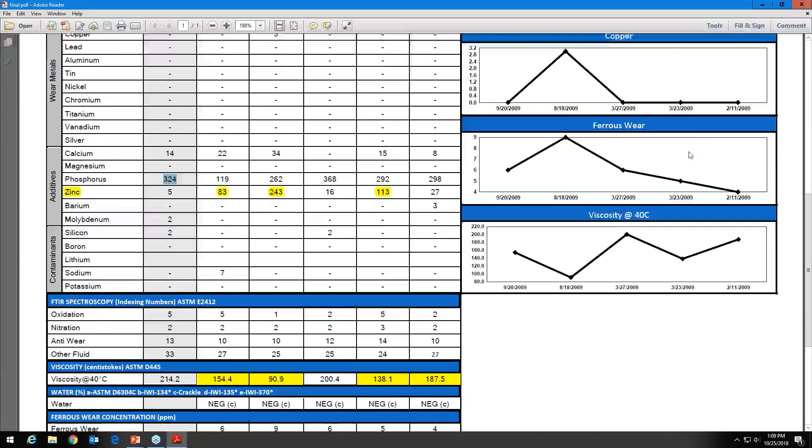It's one of those things where when you just look at them you see different things, and you're gonna have the advantage over me as far as you're gonna be on the ground floor. You're gonna be there with that machine and understand things that I may not know as the analyst just looking at the report. So I always think of this as kind of like a team effort.

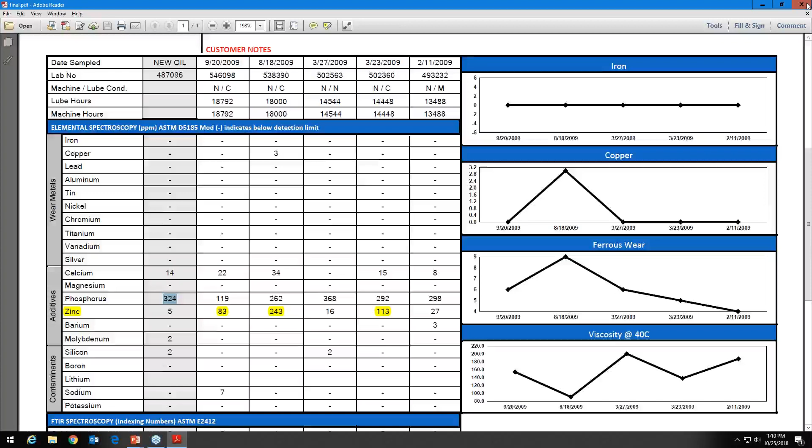The customer did talk about that with us and told us what was going on with it, and that's why I'm relating that to you about how this machine was critical to production. We had to keep it running. We couldn't really fix the problem, and that's why we see that kind of information.